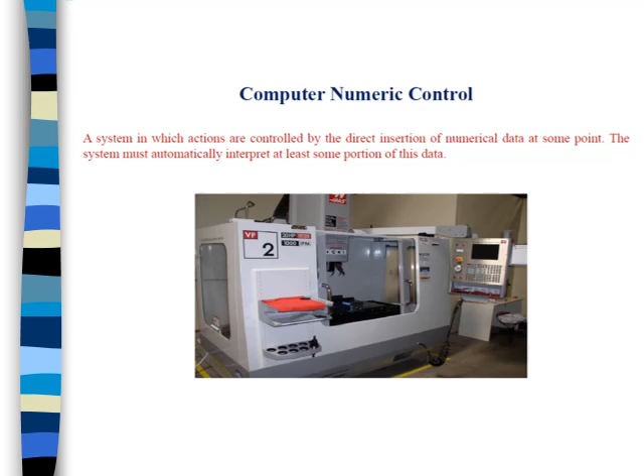Today we will learn about computer numeric control. This is a system in which actions are controlled by the direct insertion of numerical data at some point. The data system must automatically interpret at least some portion of this data by computer.

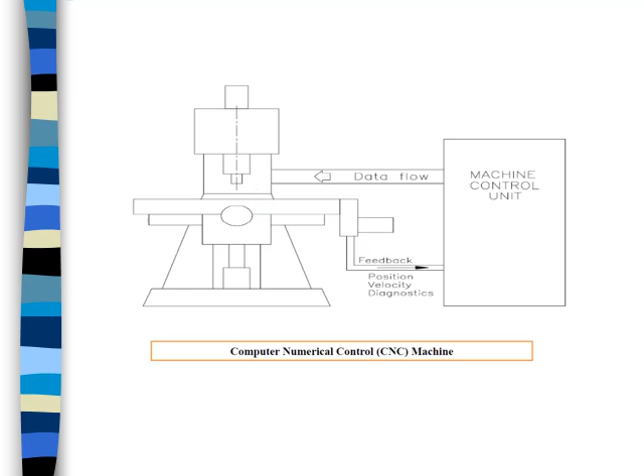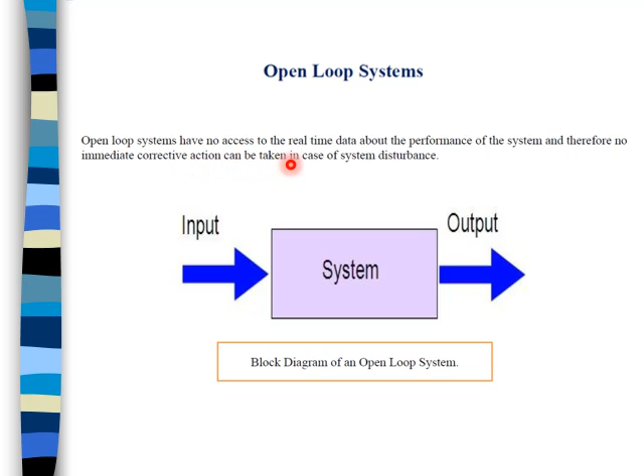This is the open loop system, and this is the block diagram of open loop systems. Open loop systems have no access to real-time data about the performance of the system, and therefore no immediate corrective actions can be taken in case of system disturbance. This is the diagram of open loop systems.

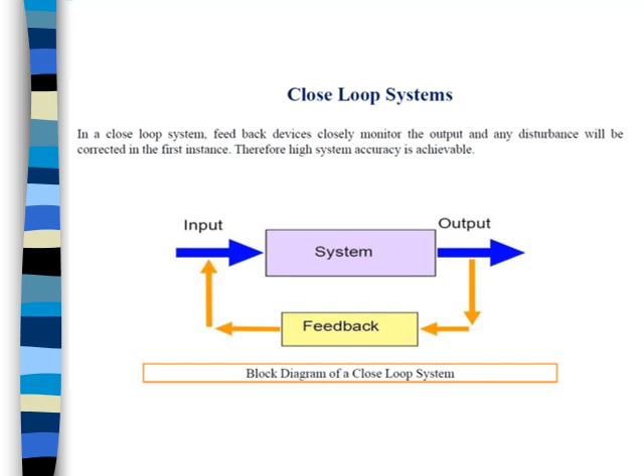Now this is the closed loop system, and the feedback is done with the help of closed loop systems. Feedback devices closely monitor the output, and any disturbance will be corrected in the first instance. Therefore high system accuracy is achievable. This is the diagram of closed loop systems.

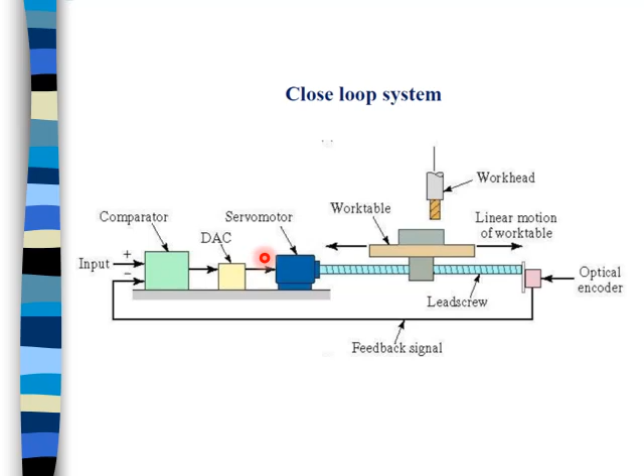Here the work table is directly connected to the spindle of a servo motor or stepper motor, and an optical encoder is connected to the spindle of the servo motor. The feedback signal from the optical encoder goes to the comparator, which compares the actual instructions and the coded instructions. This signal then goes into the digital to analog converter, and corrective actions are done in the servo motor.

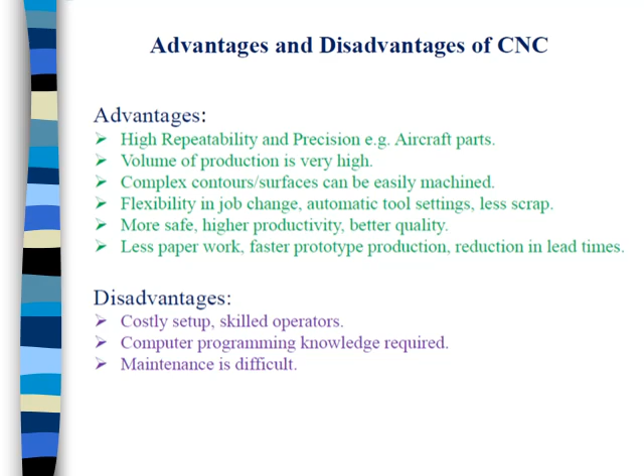There are some disadvantages of CNC machines also: costly setup and skilled operators are the major disadvantages. Computer programming knowledge is required to run the machines, and maintenance is difficult. So these are the disadvantages of the CNC machine.

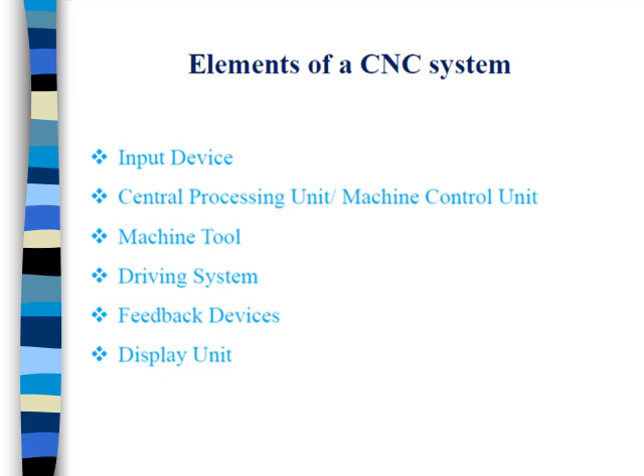So now there are six basic elements of CNC machines: input devices, central processing unit, machine tools, driving systems, feedback systems. What are the input devices? Input devices include floppy disk drive, USB flash drive, serial communication or Ethernet communication, and conversational program.

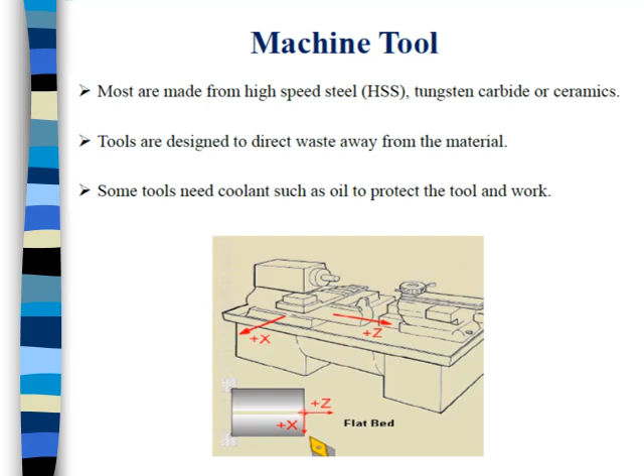Most tools are made of high-speed steel, tungsten carbide, or ceramics. Tools are designed to direct waste away from the material. Some tools need coolant such as oil to protect the tool and the work.

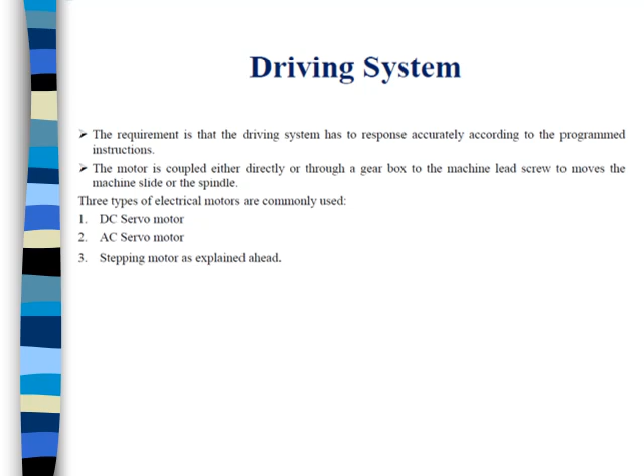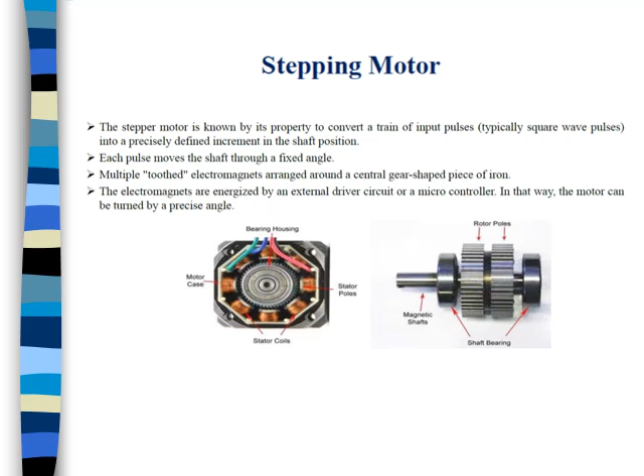What does the driving system include? The driving system includes the AC servo motor or DC servo motor generally, and the stepper motor - we will discuss later the function of the stepper motor. Just know that the stepper motor is used in CNC without the feedback control unit. Otherwise, the servo motor can be used for the driving unit.

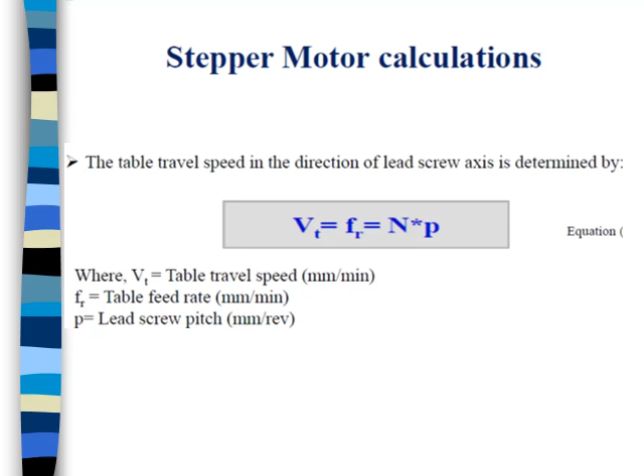The table travel speed in the direction of the lead screw is determined by one equation: Vt equals Fr equals N multiplied by P, where Vt is the table travel speed, Fr is the table feed rate, and P is the lead of the screw.

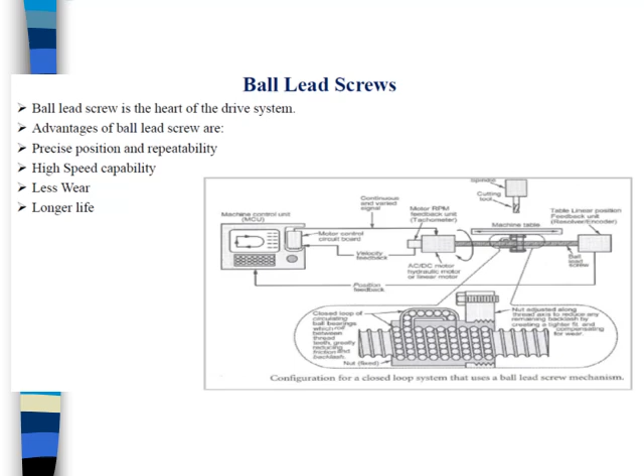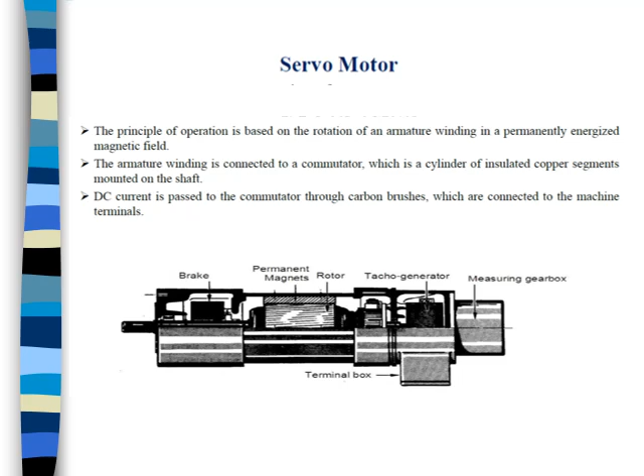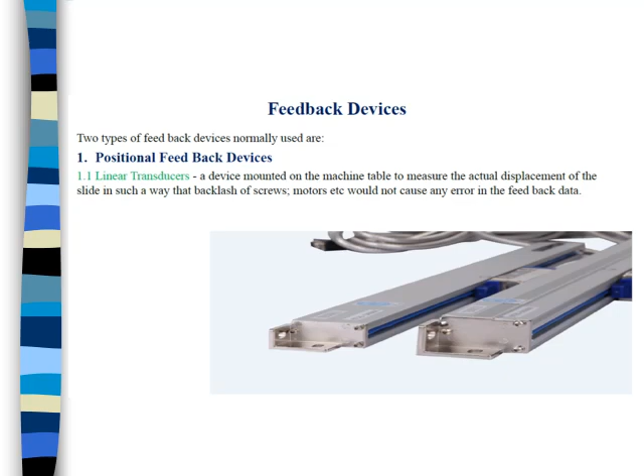Sometimes servo motor is also used in CNC machines for precision control as well as feedback monitoring. There are some feedback devices necessary to take corrective actions between the coded instruction and actual movement. For linear movement, linear transducers can be used for position feedback, and sometimes rotary encoders are also used for feedback control.

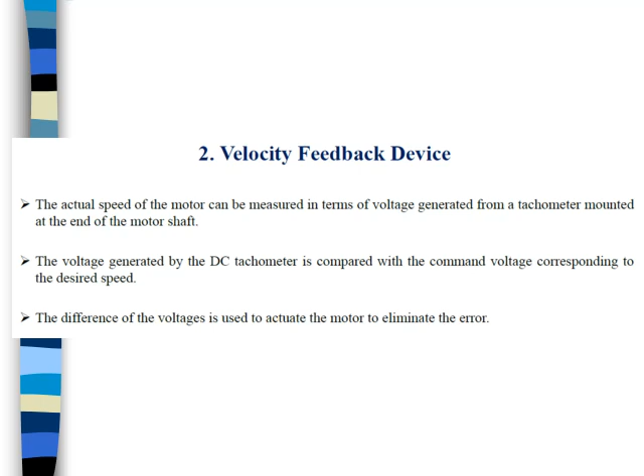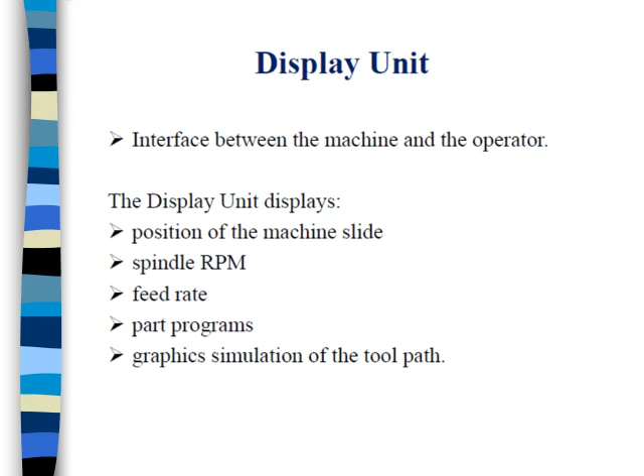Velocity feedback devices can also be used for velocity feedback. Some display unit is also necessary. The function of display units includes showing position of the machine slides, spindle RPM, feed rate, part programs, and graphic simulation of the tool path.